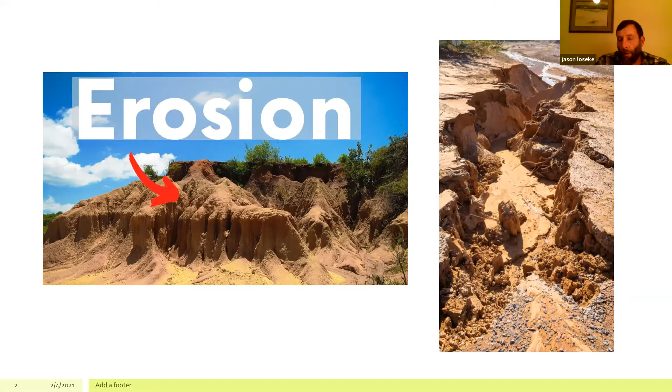I kind of wanted to illustrate the Grand Canyon here, which was created basically just by the flow of the Colorado River. There's nothing unusual about it. It just is the movement of water that carved that out of our landscape. The same happens in our backyards. If we can slow or stop that flow of water or the speed of the water, then we can slow or stop the erosion. So downspouts are one of the main things in the suburban yard that causes that issue because of the channeling of that water.

Sometimes the water just sits, just collects in a low spot. A lot of times these sidewalks perhaps have settled a little bit. Perhaps the lawn has been built up over the years. We want to build topsoil, and sometimes that works against us in this situation. It's an easy remedy to fix it, but we don't necessarily have to totally tear apart the entire landscape in order to do it. So I encourage people to think outside the box. How can we do it? We can reduce the lawn in this case.

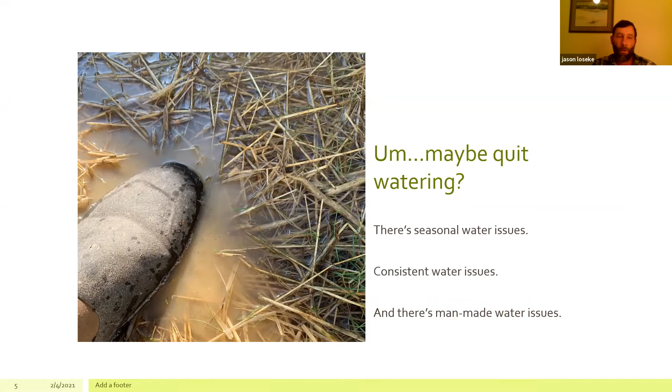But installation obviously is key, as well as the design of the system, or the thought process that goes into it. Installation is very important. As near as we could figure, they just backfilled it with a bunch of chunky dirt, perhaps with machinery, and basically crushed the pipe when they put the dirt back into the trench. So it's a simple process. Drainage, water goes downhill, and be careful when you install it. That's about it.

Other than that, you have to put the system in the right place, and you have to design it in a way that holds enough water, that absorbs or can handle the amount of water that you have. In this case, no amount of water is going to get through that, basically.

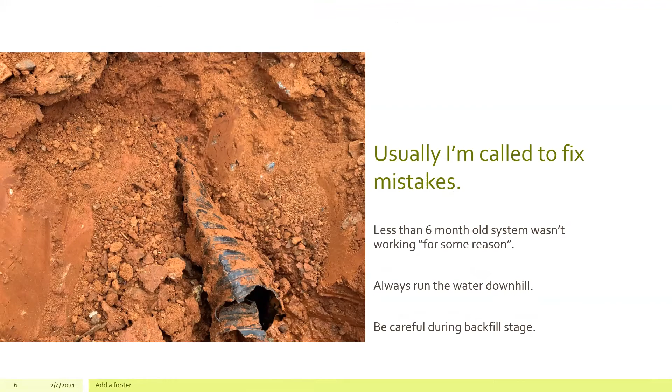Yeah, the trick is getting the water to where we want it to go. Oftentimes, look, I can't stop the water. I can't. Seeks its own level. Yeah, it's gonna go where it wants to go. All I can do is help get it to where it wants to go without causing problems along the way. And that unfortunately includes causing problems for my neighbors, right?

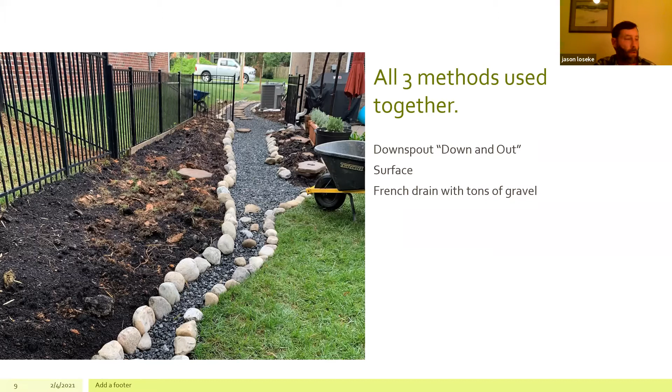Christina, you want me to go to about 7:45, is that right? Yeah, because we got a few questions already, so yeah.

Yeah, all right. So let me talk about channel drains. As we go through, we're going to go through the different types of drains, and we're going to talk about different solutions as we go. All of this is all encompassing. Essentially, I can use all of the systems interchangeably. And also everybody's yard is going to be different. Everybody's situation is different. Everybody's grade is different. Their soil is different. Sometimes I don't know the answer to that question until I'm actually digging.

This is going to be a channel drain. Many of us have buildings, homes, driveways, where the water flows down a hill, and the only place for it to go is right up against the building. Or perhaps it's coming off of a walkway or off of a building going into the yard. It would go both directions. The channel drain is a drain that runs basically parallel with a structure or a walkway.

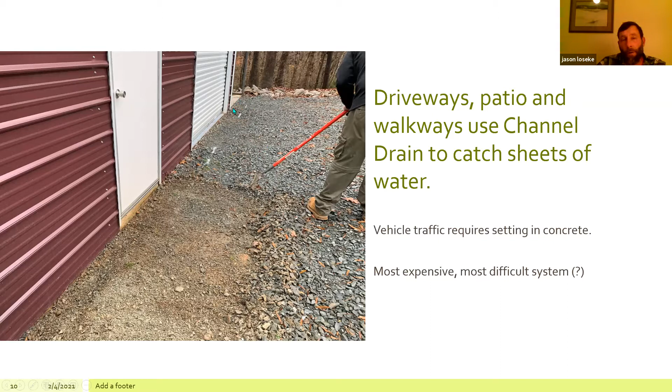In the case of vehicles crossing over it, the parking area here, it has to be set in concrete. So against a walkway or a patio where it's just foot traffic, this would be fine set in gravel, even in soil, but compacted, sturdy.

But in the case of vehicular traffic, it has to be set in concrete. Anyway, this is at the end of a long hill, gravel driveway, and the owner even knew that up until about 2 inches per hour, his shop was completely safe and dry, but above 2 inches of rain per hour it's flooded. So we knew basically what we had to deal with and the amount of water that we had to deal with. And we installed what's called a channel drain.

So this goes down, you know, again, comes across the driveway, goes into the channel and out a pipe downhill. Down and out is the main idea with drainage. Probably, I don't know, 80% of my projects are downspouts.

And how do I install a beautiful landscape, mulched bed, flower garden with plastic pipes or other systems running across the surface? Many of those materials are not UV safe, or at least over time will become brittle. You know, string trimmers, weed eaters, lawnmowers, squirrels, whatever, have their heyday with them.

Retaining walls are notorious for collapsing due to water. Usually it's the pressure or the erosion from underneath. And in this case, it was pooling and going over the top. So it eroded and collapsed the wall because there was so much water on the back side of the wall that it waterfalled over the top of it and collapsed the wall. We had to fix that problem somehow.

And this is not a French drain. A French drain absorbs water. This is just a catch basin that catches the water and sends it under the wall down into the natural area. We're just transferring the water, which is method number one, essentially. Taking water from one place, sending it to another. Same thing, downspouts.

Hopefully you can see in both photos, we tried to get it as close to the house as we could to avoid planting and future renovation here. And luckily, the grade took us downhill so it didn't require very much digging. You can already see the water that was pooling in the trench as we're digging. That happens often. That kind of tells us we're doing the right thing.

This is a path and patio to the front door, but all of the water goes down this way. So the slope is down here, but this is the front entrance. So we had all of the downspouts dumping into this area. And I believe even over here to the right, more downspouts came this direction. So the trick was to set up the catch basin to catch both the surface water off the patio as well as the downspout water. As far as I know, the system still is working today without any problems.

Slight grading, this is always about grading, you guys. I'm going to talk about that a little bit more. But grading is very important. We have to get the water to where we want it. Putting a drain in the ground is not enough. I have to get the water to the drain. So oftentimes when I go digging a hole and disturbing soil, I end up with soil piled around the drain and water flowing away from it instead of into it.

This is what we would call a French drain. A French drain, I would love it if a master gardener would do the research to tell me that French drains are everything that we consider drains, is my understanding. I think the French invented drains, I believe. But the way we talk about it around here is a French drain is taking water and absorbing it into the ground.

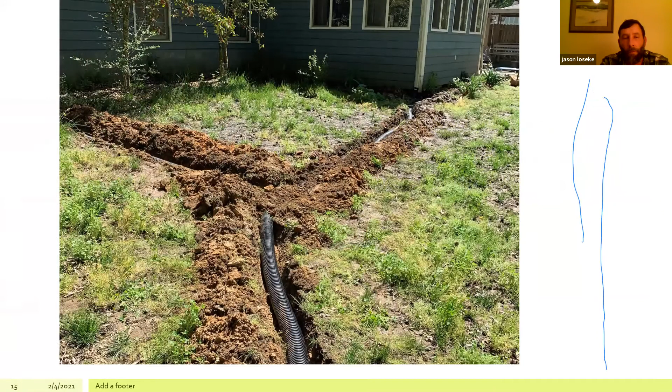A French drain is not what you've seen so far. What you've seen so far is, like I said, down and out. These are catch basins. We're moving water from one place to another. This is not a French drain. A French drain is taking water and trying to filter it, absorb it, and then move it. So in this case, the water goes through the rocks into a perforated pipe, and the pipe is routed to a place that's not in your flower bed with the chlorine or salt water.

You can imagine I replaced an obscene amount of plants in this landscape before we figured out how to fix the chlorine and the saltwater problem. So this was reverse engineered and very expensive for yours truly, but it works. So it just took some time and some figuring it out, but taking the water down through the rocks and out through a perforated pipe is a French drain.

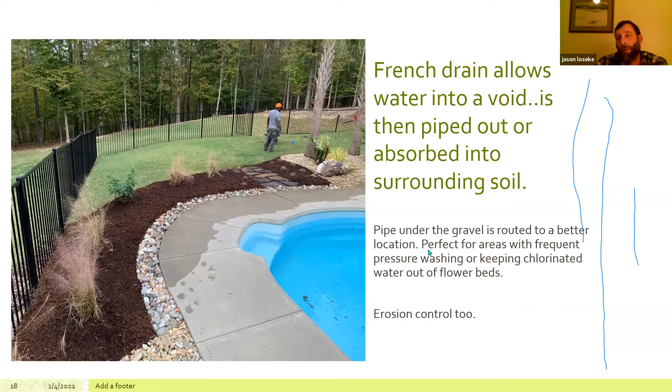You're going to see more stone involved in erosion control. I think stone is key. This is a French drain. I'm sorry that there aren't better details, but basically under the trench is a perforated pipe that's wrapped in a geotextile that's like a sock. It prevents silt mostly. They say it prevents some roots, but truly it's meant to prevent blockage. And what it allows is the water to filter through.

This is a product that's called, oh gosh, wick drain is one name of it, and strip drain is another name of it. And what it does is basically it just absorbs the water down through the surface, through a sand backfill, and then pipes it downhill out to where we go. And where we went was out to the front yard, where we picked up the downspouts on the way.

So the downspouts on the corner of the house is where we transitioned from French drain to a solid pipe. And then the solid pipe continues the water out to the pop-up drain here. Strip drains, wick drains, French drains are not meant to move water. They're not meant for flowing water like a downspout. They're meant to draw water down and in.

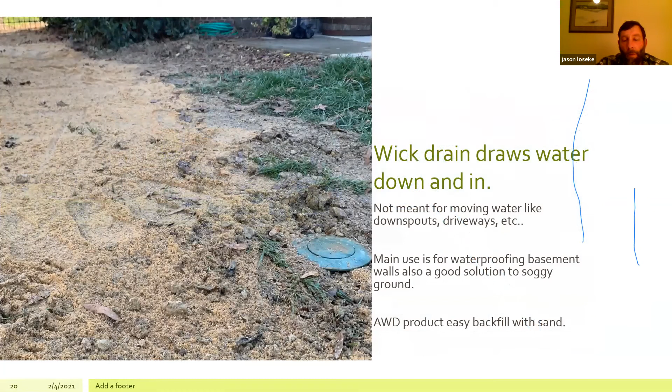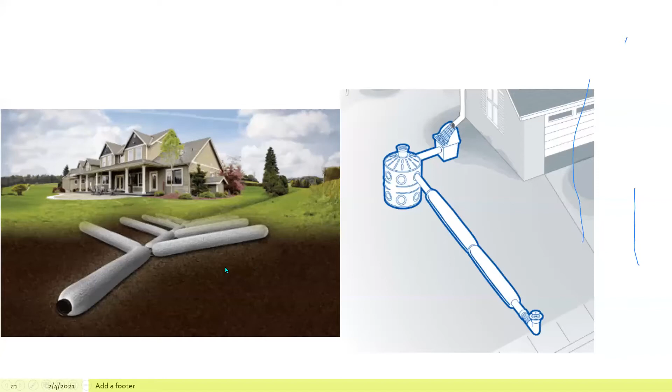An interesting point that I just learned the other day was that the strip drain, the wick drain, is something like 80% openings, where a traditional corrugated perforated pipe that has the slits in it is only 5%. So, again, salesmen are what salesmen are, but if his ratios are true, the way it's designed and constructed, I can see how it's more. I don't know that the numbers are accurate, but you can definitely tell that it's more.

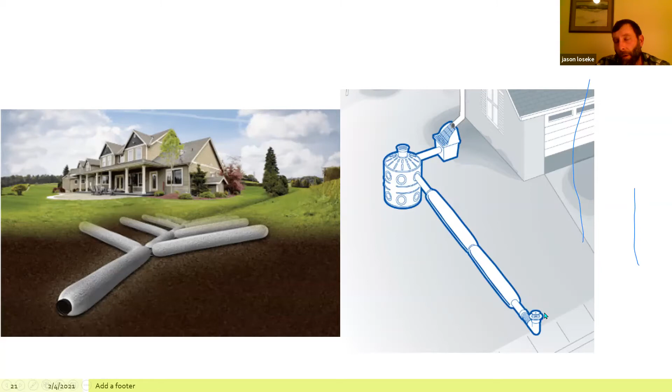On this side, you can tell this is a downspout into a catch basin that could catch surface water. This looks like some sort of filter type catch basin. And then it goes into a larger in-ground basin to allow the absorption. These are roughly 50 gallons. They would be surrounded by gravel, so that would hold exponentially more water, and then of course what absorbs into the ground. And then this is that same styrofoam EZflow drain. When rainwater gets too much, it pops out onto the city system, into the gutters, essentially.

But always, luckily, most of my business involves the telecommunication, cable, internet lines, not life-threatening, but trenchers. A trencher is going to cause serious damage to a gas line, electric line. That's going to be serious. And that's often what we rent or use in order to dig these trenches. So you do need to be very careful when you're not only operating machinery, but just dealing with digging in general.

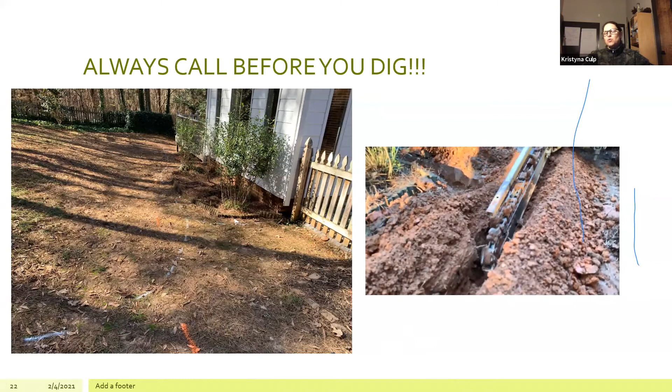Jason, we do have a lot of questions, just so you are prepared for that. All right.

Again, trenching is tough work. Be careful. On the right-hand side, this project was similar to what you just saw. It's an in-ground system, because this land is almost completely flat. I mean, this was just a dead level flat lot that they built on in the Stonebridge neighborhood. And that is one reason why we didn't have anywhere to go with the water. So we tried to keep all the water on the property.

And we did that by digging a 4 by 4 by 4 foot deep hole on this end and on that end in order to bury those basins, the wells, and then had that pipe all through the system. That's where we started. As soon as we trenched it, we had water flowing into the trench just as soon as we started digging.

That's that, even more holding capacity and easier backfill. And this was one of our first times using this product, so we weren't quite sure what to expect. And then oftentimes, as you can tell, grading and drainage is all inclusive and all important. And then when we're done, we can make it look good.

So this is another way that we take care of drainage, is to come up above the drainage. You know, that's 4 inches or more of gravel right there with stones sitting on top of it. 4 inches of water is a lot. So sometimes just a pathway is all it takes.

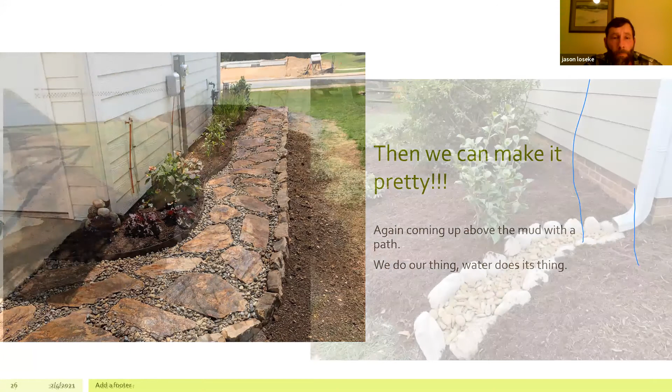Surface drains are becoming way more popular. I like them personally, and a lot of people are starting to like them a lot as well. It solves a lot of the issues. If there's a problem, you can see it, you can fix it. There's no digging, there's no unknowns. It's all right there on the surface. So water just stays, you know, this is a dry creek bed or

surface drain. Is that the same as a French drain then, or no? No, not at all. This is strictly water on a surface. This is just like a ditch. This is like a creek. There's no difference between a creek and this, only that this only has water in it basically when it rains or when it's wet.

Yeah, this would go down into a drain, and then that pipes into the neighborhood system. You know, that was put in by the builder. They had grass on this side of the fence and the neighbor had installed this area to come to this drain, but on this side was still the original landscape. So there was no anticipation of where the water would go. So it caused problems. Again, one neighbor basically caused issues for the next neighbor. One neighbor had the drain, one didn't. So all we had to do was accept the water.

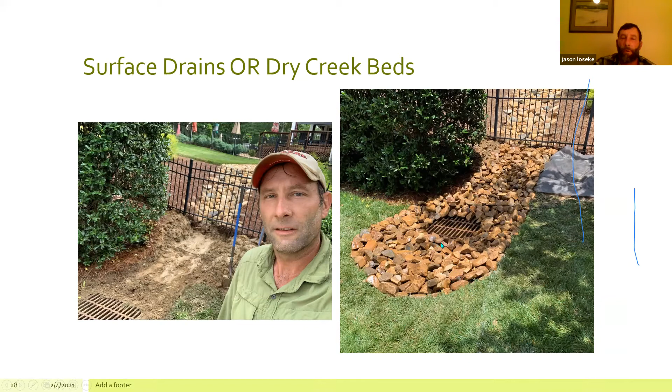Well, Jason, that was actually one of the questions. When you have a problem that is sort of caused by your neighbor, or you're causing the problem for another neighbor, do you have to get an easement to fix that? Or is it just a conversation, and how does that work?

Well, you know, the easy answer is yes, have a conversation. The easy answer is come to a compromise and solve it together, because it's both of our problems if the water is between both of our houses. That's the way I approach it. I would really be upset with my neighbor if they did not understand that, and I can imagine that many of our neighbors would not understand that, and that's unfortunate. But the easy answer is fix it amongst yourselves, team up, everybody tie their downspouts together, have one place that it goes to, and try not to make it worse, basically.

And that's probably easier when you can tie into city sewer. Of course, not quite as easy when you can't. Any other system, even here where we're going into a natural area, this is 12 Mile Creek right down here. So I don't want to encourage anything to flow into 12 Mile Creek, on a personal level, but also as a landscaper and a professional. Again, let's not make it worse.

But by exiting and picking it up on the surface, now I'm allowing filtration, evaporation, et cetera, right? So solve the problem, and try to mitigate any kind of downhill situation. Again, I don't know this creek. This is behind the reserve on Cane Creek Road. I don't know what this waterway is back here. So anyway, this fence line was being eroded tremendously.

I can't believe I don't have a before photo, but those posts were barely standing up. I mean, the concrete was completely exposed on these posts. So, a lot of gravel, and then pretty rock on the customer side. And they agreed with their neighbor. And I don't think I showed it. I didn't. But the neighbor, as you can see, was a less expensive version. A few boulders to slow the water, otherwise just gravel to prevent erosion and to prevent the fence from falling over.

That's about a year old. I just saw it the other day. It still looks good. Sometimes, you guys, it's erosion. Not often is my problem erosion. Usually it's erosion being caused by other issues, right? But erosion, stone, in my opinion, I don't know if it's because I come from Colorado or what, but it's pretty, it's functional, and it does the trick.

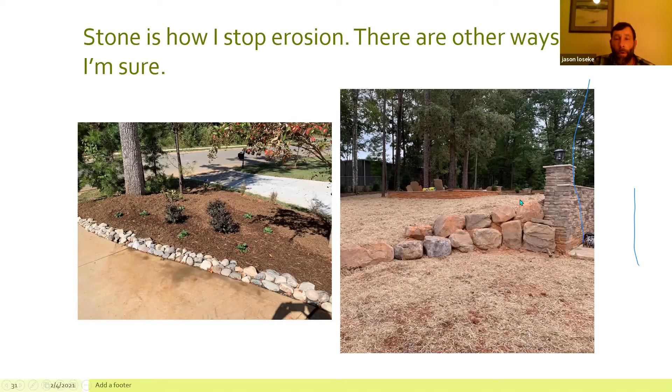This was a big driveway, all sloping. This is downhill to the neighbor's driveway. Everything is sloping into the mulch bed, all the downspouts, a patio, everything. So we stopped it with just basically a strip of nice rock. It allows the water to at least slow and or redirect downhill down the driveway where it was supposed to go. I guess the way it was intended to go. When it was built, it just didn't function that way. And then here as well, to reduce the slope, we just piled up some rocks, big rocks, but reduce the slope. It's not quite as steep.

Same thing here, terraces, steps, landings, terraces, a tire cut in half, a little half circle of a spare tire. Whatever, 3 or 4 stones piled up in front of the new plant that you're planting on the hillside will prevent that water or the soil from washing down the hill, at least initially, in order to get that plant started, right? That's the point. And then functionally, you'd have to maintain it and probably make it a little bit bigger than most of us intend at the beginning.

I encourage people to go big with stuff. And that's not an upsell. We often under engineer things. We under plan, we undersize. Go a little bit, like an extra ton of dirt is like $35 in material. It's not worth it to skimp on certain things, like 3 steps instead of 2 or whatever, for example.

Well, and Jason, because I see an AC unit back there, one of the questions was that they moved their AC for access, and there were stones under it, and they moved the stones, and now they have water. Was moving the stones a bad idea? Wait, now tell me again. I moved my AC for access, and the stones under it, and now I have water puddles constantly. Is this a window unit maybe instead of a... Could be, yeah.

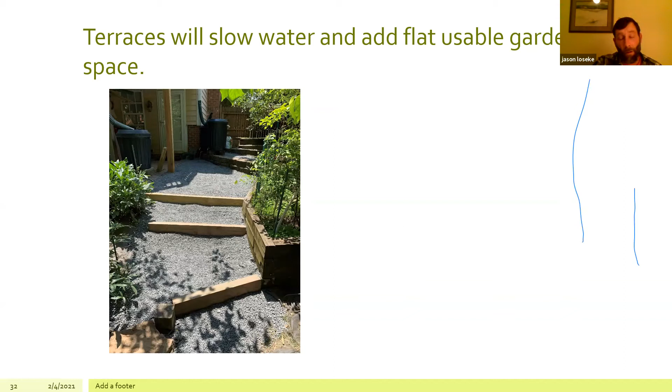Yeah. Okay. A lot of times, we just did a drain last week, you guys. I've never seen dirt like this in my life. It was just unusual how the water sat in the first 3 inches of the soil, and then underneath it was no moisture at all, it seemed like. Even in this climate right now, it seemed bone dry underneath, and it was rock hard powder. It was white powder, basically. The point I'm making is those drainage issues were a soil issue that we fixed, hopefully, but certainly was a soil issue.

Well, and I think that goes to a question that we just got. She was asking, how do you determine the size of a system you'll need, and what do you measure? And you said at the beginning, every situation is different. And now we've added that everybody's soil is different potentially. I looked at soil maps in the area, and there's all kinds of soil around here. Right. Don't we have like 3 or 4 at least? At least I have 3 or 4 in my yard. So you have to take all of that into consideration for sizing. You do. If I'm trying to catch the water and keep it on my property, I need to probably go as big as possible, literally as big as either financially or physically possible. And that's what we did with that project I showed you before.

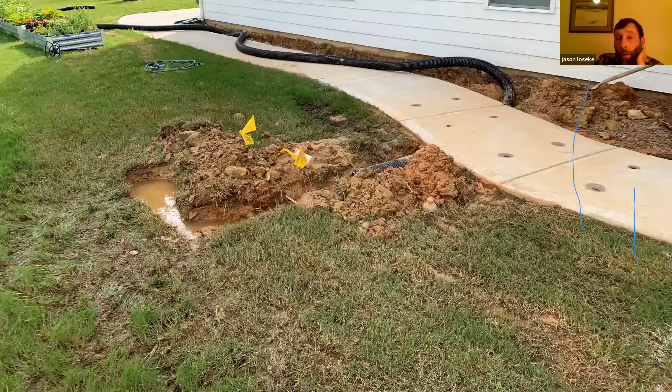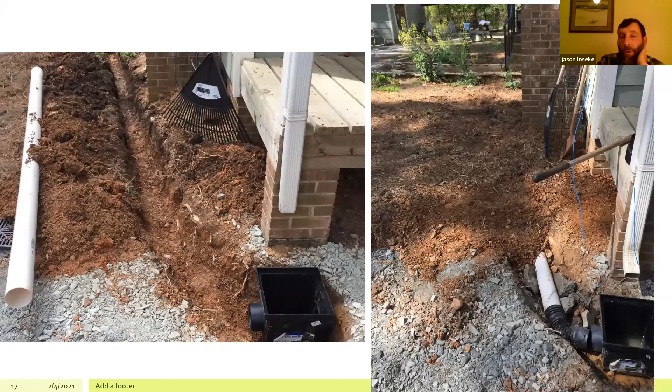So the house that you showed that had the 2 downspouts, the inside corner is where they were having water problems. So would another downspout or more than one more have helped that problem? And leveling the gutters? That was exactly my recommendation, was to get another downspout in that gutter, in that corner, or to reinstall the downspouts where they flowed away from the corner, right?

But also home maintenance, keeping the gutters clean. That was really the issue, to be quite honest. So a lot of our problems are from gutters that aren't leveled properly. I shouldn't say level because you don't want them to be perfectly level. You want them to go toward the well, level to the direction you want. Correct. Exactly. Yes, ma'am. Yeah, we always say, I want a level on my drain pipe, but I don't actually want my drain pipe level. I want it downhill. But we still put a level on it, you know.

You're absolutely right. Many of the issues that we find are because of changes, and the changes are caused by Mother Nature, sediment, lawn mowing, dogs' paths as they run and build that soil up, just like a dirt bike would, into a corner, or whatever. There's all sorts of ways that the landscape changes over time. No fault of anybody's. It just changes.

And sometimes the solution is just getting out a shovel, quite honestly. Many times the solution is just a little bit of slight grading. And I don't mean cutting a trench. I just mean taking away that high spot that's built up over the last 10 years, which might involve a tractor, and it might involve a shovel and a strong back.

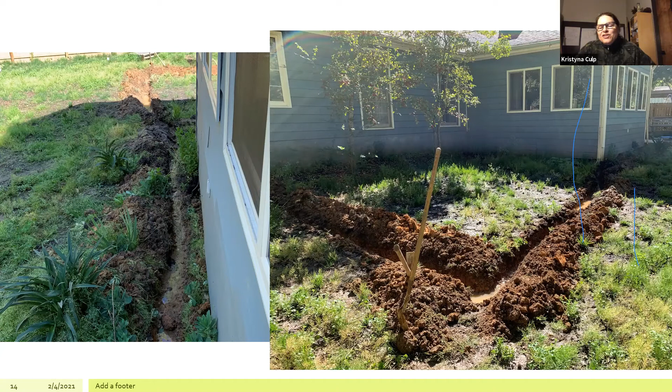Can you talk a little bit about rain barrels? It rains about 5 minutes at my house and the rain barrel's full. Totally. One thing, I did a disservice in this presentation in not talking about rain gardens. Oh, and that was the other question. I have two depressions in my yard. They're not gardens, but they do catch the rain. One was natural; it happened on its own, and the other one I built.

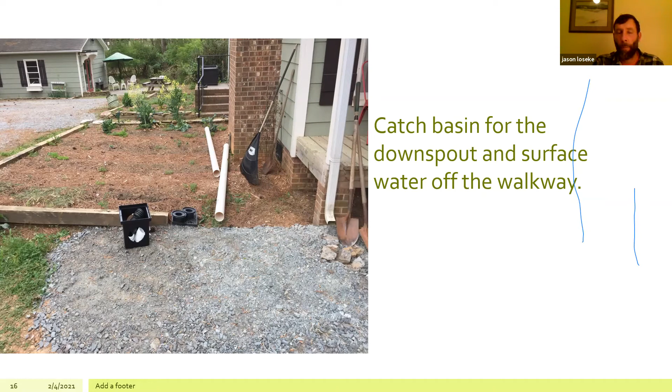The idea is just to catch. They don't catch all the rain in a torrential downpour. I'm sure there's water that's flowing around it or by it. The idea is not to stop the water, it's just to slow it, right? Just like we did with the terraces, the steps, the rocks. I'm not going to stop water. I'm not going to control it, but where this flows out, if that possibly is going to erode that hillside, it probably needs some stone or some stair steps down below it in order to slow it down and prevent erosion below it.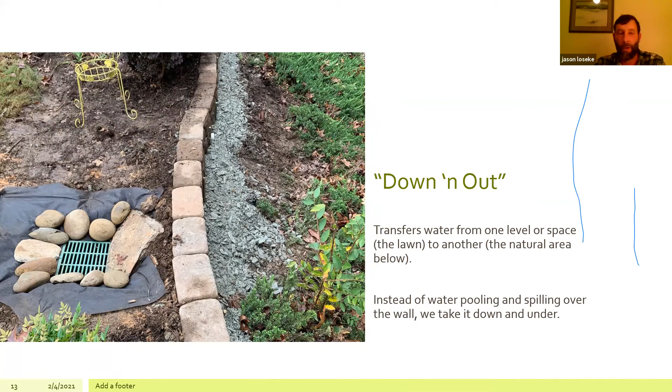But rain barrels, rain gardens, anything that's going to slow that onslaught of water that we get in our torrential downpours, right? That cause not only flooding, but also the pollution. You know, they wash all of that stuff with it. And it's that first flush, they call it, of water that's the most toxic. So if we can prevent that, which is kind of the basis of, you know, these developments.

I know many of us, you know, don't want the development and don't like it and don't approve of it maybe, but at the same time, many of the technologies that they're using now in developments are designed in order to do better than what Mother Nature did in the stopping of that water, that first flush, and to slow it.

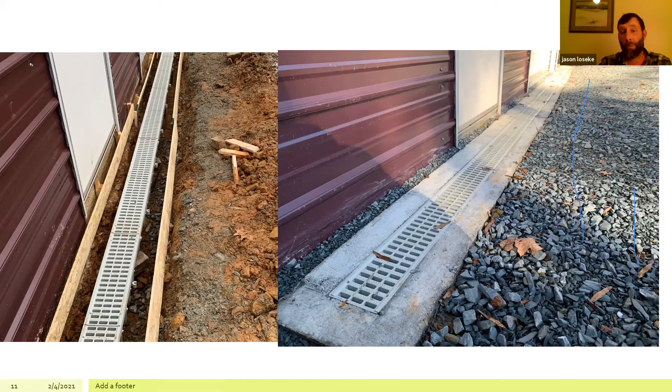I'm the first proponent to say that building increases runoff and impervious surfaces increase runoff, and those lead to problems, and they do. And they're all downstream. They're not my problem, right? They're downstream of me, which is a backwards way of thinking. I should be thinking about how to improve that water downstream. But what they're doing with retention ponds is my point.

What they're doing to stair step that water down into the natural system is really doing wonders for improving the way the water flows out of our urban areas. So just like I can't stop the water, I can't stop the growth, but what I can do is sort of protect what's going downstream, basically.

I never want to shoot that water as fast as possible, as efficiently as possible to somebody else. I never want to do that. There's even laws that don't allow me to do that, right? That prevent me from doing that.

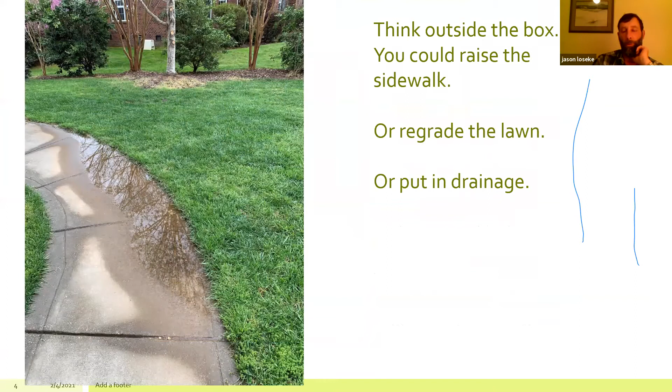So we had one more question that was, could we see the built up sidewalk again? And I think that might have been really early on. Yeah, that's what I told you earlier. I thought you had taken a picture of my old house. I had no idea you could do that. The sunk sidewalk. Well, then did you show it built up? I don't know if you showed one that was built up.

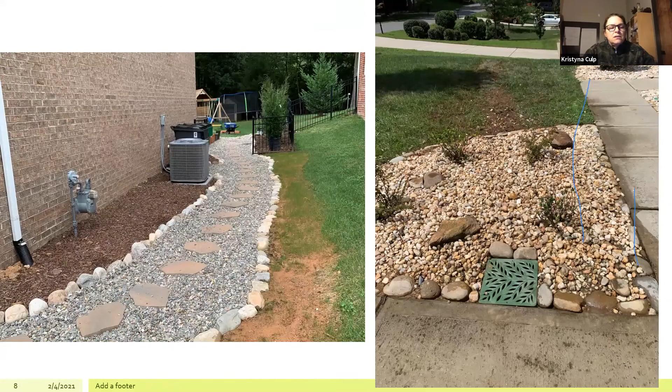Yeah, how come I can't get out of the thing? I can see it. We can see it. Yeah, I meant to look at my whole presentation. Oh, you need to get out of presentation mode. Yeah. Which is easier for me to say than to do.

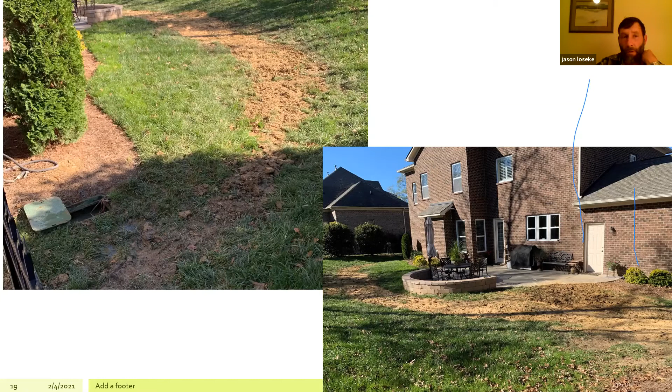Maybe it was the extra runoff. Maybe it was how their machinery might have destroyed the soil structure and it didn't allow it to drain. But as soon as we put in that strip drain, that sucker was dry as a bone, they said. It's amazing how fast that stuff can work sometimes.

So anyway, we took the downspout down that strip under the sidewalk after we raised it. Basically, he drilled holes in the sidewalk and pumped a slurry of sand and cement underneath it, and it jacked it up just like you would a foundation or something else. That is fascinating. It really worked like a charm. This guy's a friend of mine.

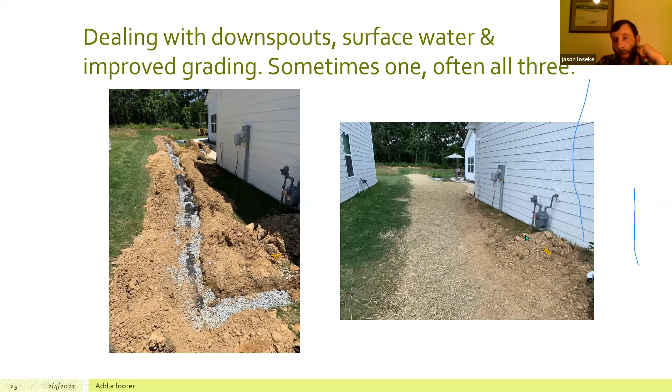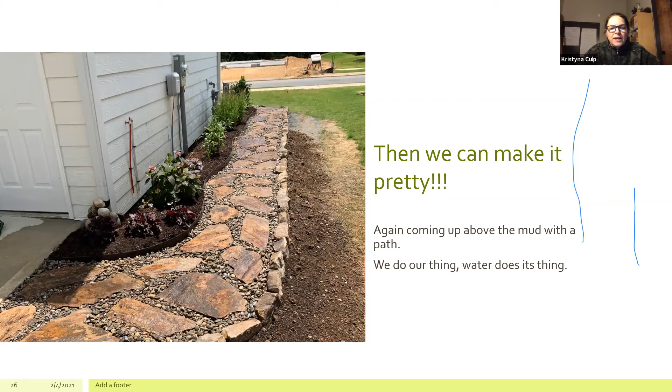Well, that is all of the questions. I have one though. I think we need to do a talk on rain gardens. Absolutely, please. And I was also going to suggest soil science, not just healthy plants, but also drainage and things like that. Yeah, that's a great idea.

I learned a lot from soil science back in the day. It's not the sexiest thing in the world, but it sure is important. Nope, it can be very, very boring. Yep. But when they hit that one thing that you're like, oh, that solves all my problems, like calcium or something like that, it's eye-opening. But definitely, I think rain gardens is critical.

You see a lot of new neighborhoods are building them in the front yard. There's one off of Rea Road and Tom Short that has put them in the front yards. Like the corner of every yard has a rain garden in it. We'll have to go look at that. Yeah, they're simple, but they could be a lot better. But for a builder, that's great, right? It's actually wildly impressive. I'm surprised. That's wonderful. Yeah, I agree.

And let's look at some of those things. Plants. Let's encourage. I understand that Marvin won't let you plant anything in your retention pond or your neighborhood water catchment. And that's probably to avoid invasive species and things that they don't want. And unfortunately, they're causing a major issue, causing these sterile lakes with chemicals and stuff. I believe it's Marvin that does not allow you to put anything in the retention ponds, and that's silly. I'll have to look into that.